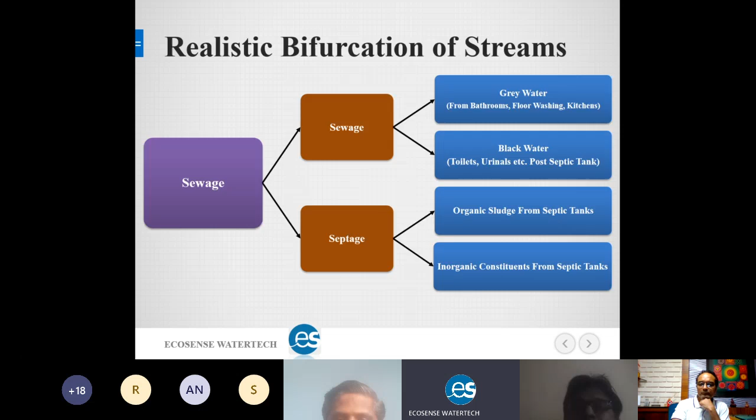Now, when we look at the constitution of sewage, we are looking at sewage generation in the following context.

Practically, when we talk about the entire sewage section, we are talking about approximately 98% to 99% of the content in the form of water, and hardly 1 to 2% of that entire quantum comes in as solids.

When we talk about the sewage water contents, the secondary demarcation is in the form of grey water and black water, which I had discussed earlier.

The third context of distinguishing the entire thing in a common manner is that when we talk about the sewage as a whole, grey water forms a majority portion of the volume, black water comes in next.

And hardly any amount comes in as septage. But as we know, septage is always the most problematic sector, which is still being studied or still being in the form of an understanding, wherein septage management comes in as a question.

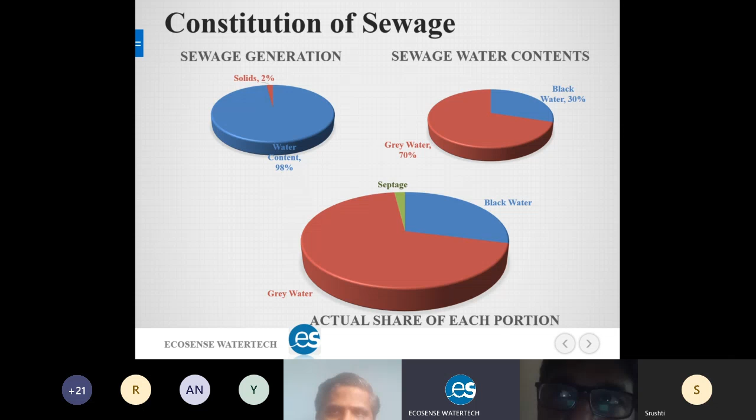When we are designing a treatment for sewage, the sewage treatment on the line similar to the bifurcation of the sewage treatment sector, this has to be again considered when you are designing a sewage treatment plant.

The sewage treatment is already bifurcated into urban community level STPs, rural STPs, and so on. But again, on the same lines, the parameters which are provided by each of these segments are significantly variable from one another.

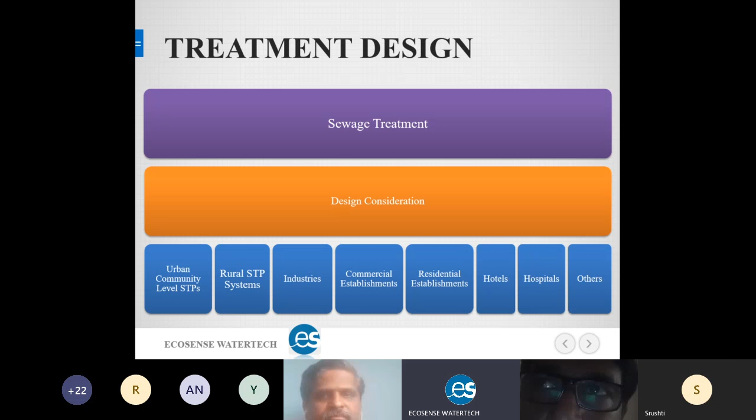Because of which each of these sewage treatment plants need to be designed as a single system. A common thumb rule cannot be applied to any of these scenarios.

Now, if we go by the baseline parameters, these can be obtained by studying any of the websites and any of the books that we have.

Normally, when we talk about that, we are talking about the BOD. Now, BOD stands for biological oxygen demand. There is a confusion in this segment, wherein many times it is called as biochemical oxygen demand, many times it is called as biological oxygen demand.

The main aim of assessing this parameter is to analyze the amount of oxygen which is required by the microorganisms in order to degrade the matter in a biological manner. That's a simple case scenario.

COD stands for chemical oxygen demand. So when we talk about black water, the black water comes in with a BOD of around 250 to 300, while the COD of the same black water comes in at 500 to 600.

Grey water has a pH which is on a bit alkaline side, obviously because of the higher amount of detergents and carbonates and bicarbonates.

The BOD of this system is very low. It is in the range of 80 to 100, and the COD is in the range of 150 to 200.

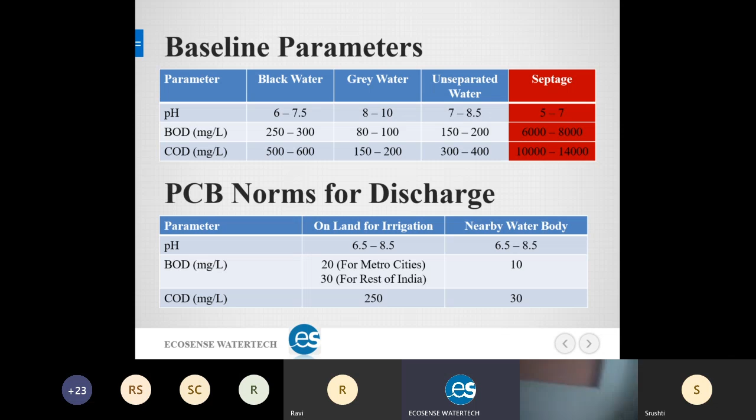Now this is for disposal on land for irrigation. When we are talking about disposal in a nearby water body, the parameters need to be much more stringent. Because of this, the PCB norms for discharge in water bodies specify BOD less than 10 and COD less than 30.

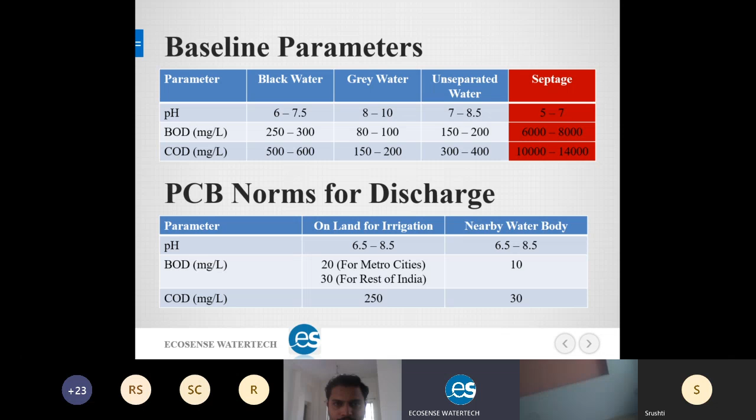Let me come back on this. When we talk about the treatment alternatives presently available for sewage, we have treatments like SBR, MBR, MBBR, AOP, ASP, and RO. I'll give the brief long form of each, but we'll discuss these in detail as we go ahead.

SBR stands for sequential batch reactor or sequencing batch reactor. MBR stands for membrane bioreactor. MBBR stands for moving bed bioreactor. AOP stands for advanced oxidation process. ASP stands for activated sludge process. RO stands for reverse osmosis.

When we talk about septage, the treatment systems available are solid thickening, drying, incineration, and digestion. There are a lot more, for which inputs may be welcome from your end as well.

Fundamentally, when we speak about septage management, we do not have an ideal, effective treatment for the same, and this is a very scary scenario. Yes, there are treatment systems being followed everywhere—some work very nicely, some have certain dangers coming in, but effectivity-wise, it's having a certain amount of issues.

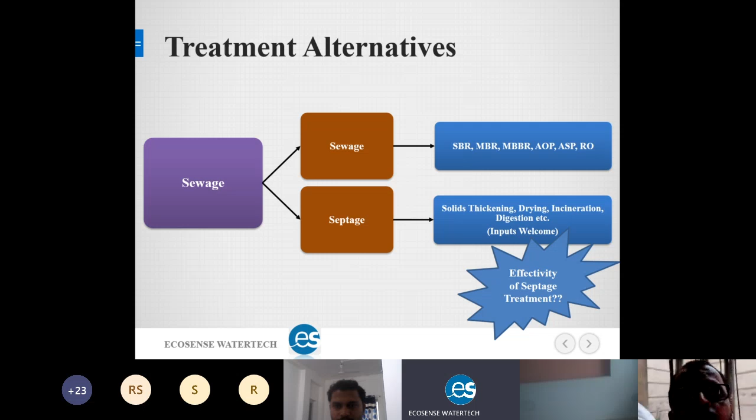Secondly, the number of users—how many people are going to be considered when we are utilizing this design for formulation of a final proposal or volume which is going to be treated by the sewage treatment plant. Third, what are the options available for disposal or reuse?

Though this is the third point, it is also very crucial, because depending on the option of disposal or reuse, the entire treatment system can be designed in a proper manner, or the design may cause a havoc. If we have disposal for gardening, that's fair enough.

But many times, which I have come across during my designing experience, there are a lot of people who require a treatment system to be installed in their basement, but they do not have even a single square meter of area for gardening. In such scenarios, it is extremely difficult to design the system.

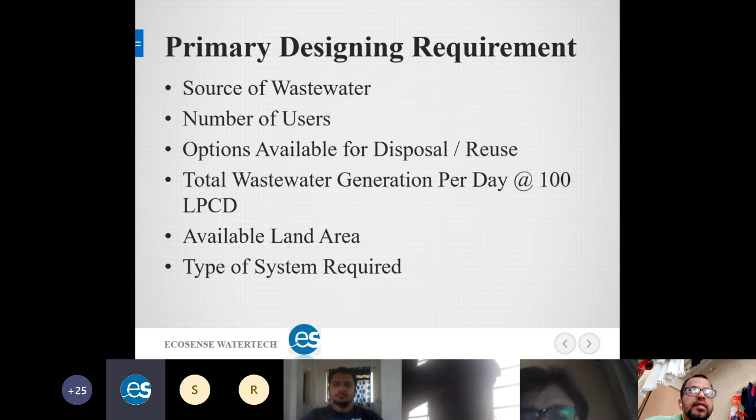Mr. Anant Kodwasal, who is a very reputed person in the sewage treatment and wastewater treatment sector, gave a seminar two days back wherein he noted that Bangalore was more inclined towards SBR, that is sequencing batch reactor, and Pune and its periphery were more inclined towards MBBR. That was the notion that he had put forward.

Before going ahead, I have prepared an example of the design for a proper system. In this scenario, let's take the example of an apartment complex with 50 flats, each flat having 5 residents. So we have 250 residents to be considered when designing.

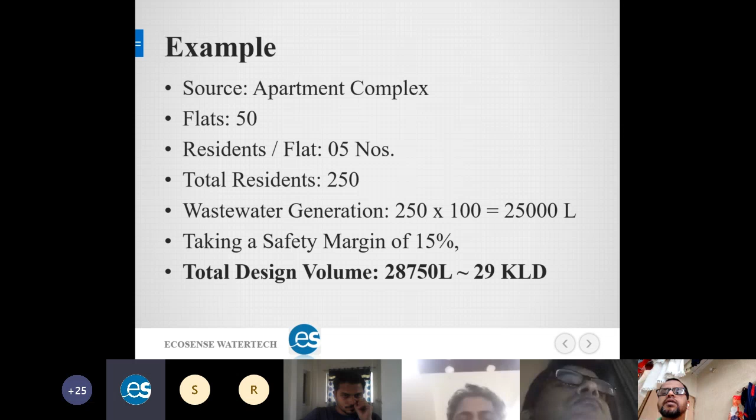Taking 100 liters per capita per day as the wastewater generation, the total amount of wastewater coming into the plant is going to be 25,000 liters. But we need to have a certain safety margin, so the total design volume at the rate of 15% safety margin comes to around 29 KLD.

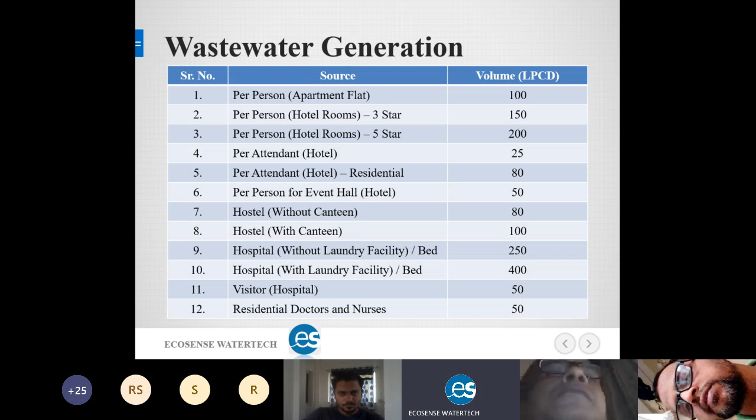This is the wastewater generation which we normally prefer for designing. Obviously, these values may differ from standard values or values given by separate organizations. But at the end of the day, keeping our experience in mind, we have tried to summarize the different types of volumes obtained from different types of sources.

For example, when we talk about a 3-star hotel, 150 liters per capita per day is the wastewater volume generated. Normally, the wastewater volume is 100 LPCD. But when we go to a 5-star hotel, we have to consider a wastewater generation volume of around 200 LPCD. Now, in any hotel, when considering a room, we have to take 2 residents as the maximum.

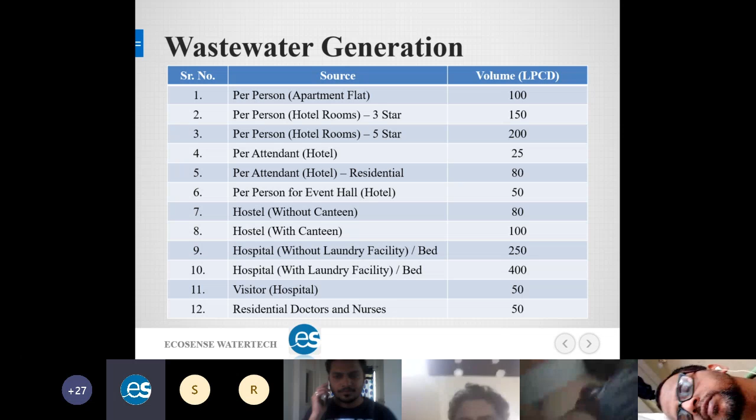This type of design may be called a conservative design, but at the end of the day, when we consider the maximum amount of flow which the sewage treatment plant is going to receive, this volume has to be considered. When we talk about installation of a sewage treatment plant for a hostel, the amount of wastewater generated for a hostel with a canteen is different than for a hostel without a canteen.

Similarly, for a hospital design, without laundry facility the amount of wastewater generated is 250 LPCD. A hospital with laundry facilities will have a volume generation of 400 LPCD.

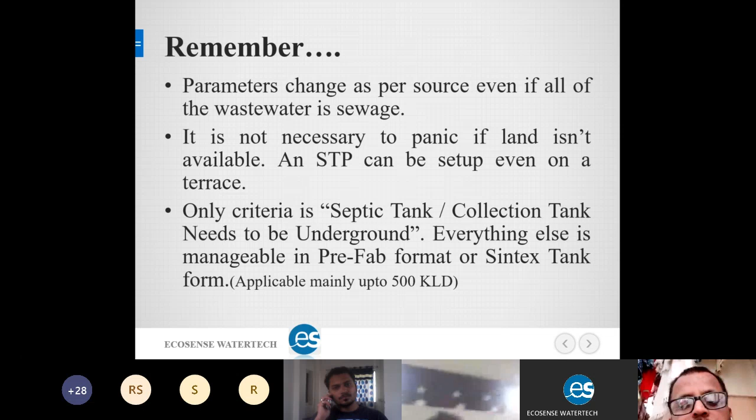End use is absolutely vital. This is to be understood very, very clearly. I have been talking about this from the start. Not deciding the end use before designing a system is very wrong, because end use itself defines the intricacy or complexity of a system.

Sewage water can definitely be treated up to drinking water quality standards. Obviously, this is a very possible scenario. Right now, the options available for treated wastewater disposal come in the form of sewer disposal, gardening, flushing, floor washing, car washing, and bathing.

In India, at the least, we are yet to come to a point where we can use that water for drinking purpose. Though it can be treated to drinking water quality, it's very difficult to find that mindset in India, where people as a whole, not just a specific community like engineers, can accept it as water suitable for drinking. As a community, it becomes difficult to visualize and make people understand that this water is good for drinking.

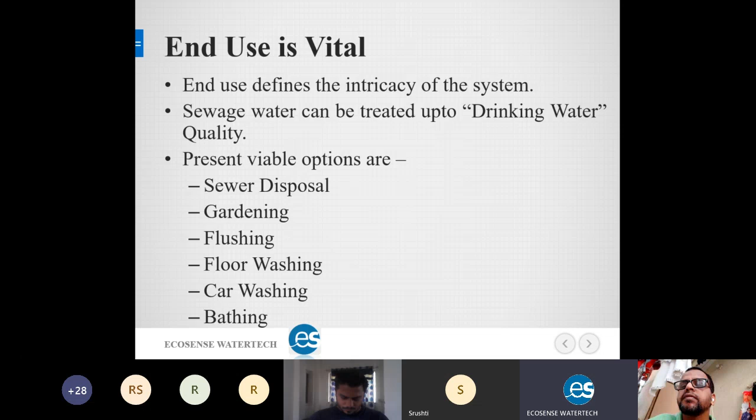This is the standard treatment flow, which applies when we are talking about sewage treatment. The primary treatment of any type of sewage comes in screening, oil and grease trap, and neutralization.

When we go into the secondary treatment systems, we are talking about anoxic or anaerobic treatment, aeration systems, SBR, MBR, MBBR, and rotating biological contactors, which is a more conventional method. It's still being used, but its use has reduced. And AOP, advanced oxidation process, is one of the newer systems which I'll discuss later.

When we are talking about disinfection, ozonation and chlorination are the mainly utilized disinfection measures right now. Tertiary filtration comes in the form of sand filters, the latest being glass filters, activated carbon filters, and advanced tertiary treatment in the form of ultrafiltration and reverse osmosis.

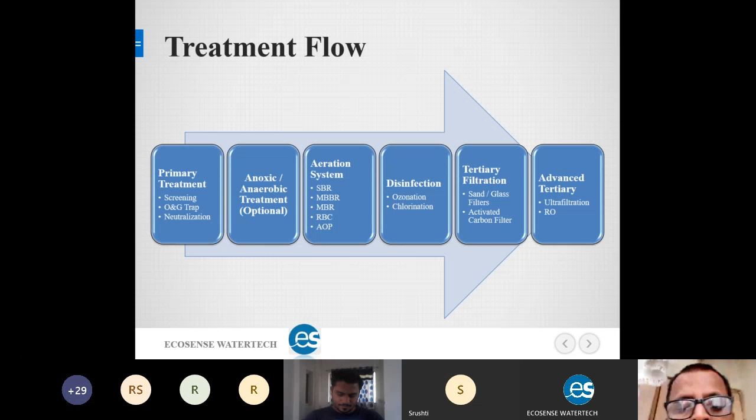Now let's take a step-by-step look. I'm taking a bit of time on these presentation slides because we need to understand exactly what the treatments are, since unless you understand those, the application of these treatments doesn't make sense.

So when we are talking about primary treatment, any and every apartment complex has its own septic tank. This is a given. Since we are coming from IPA as well as outside IPA, we as engineers and technocrats already know that a septic tank is always present for apartment complexes. Rather, for hotels and hospitals too, septic tanks are more or less always present.

Now, since we are talking about micro and mini level STPs—micro being STPs in the range of 5 KLD to around 250-300 KLD, and mini STPs in the range of 300 KLD to around 1 MLD—up to 500 KLD, if the septic tank is properly technically designed, primary treatment can be completely eliminated. There is no need for primary treatment if a properly designed septic tank is present.

But for larger plants, screening and oil and grease removal should be present. Now there is a newer mechanism wherein mechanized screening systems are available for oil and grease and suspended solids removal—I'm talking about the larger suspended solids.

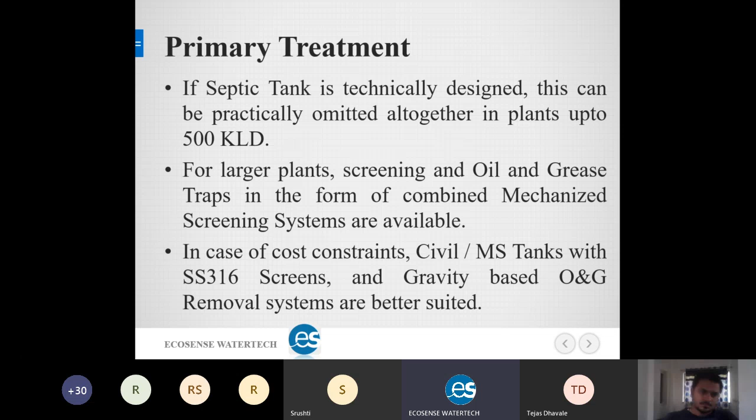That is not an issue when cost constraints don't permit you to go for a higher end treatment. The secondary treatment which we come to in STP design involves anoxic treatment systems or anaerobic treatment systems.

These treatments are actually very difficult to handle, and because of that, many anaerobic treatment system options are completely eliminated from sewage treatment plant designs.

But in many scenarios, it is crucial to understand that anaerobic treatment systems are a very robust type of system which can handle shock loads extremely efficiently. Having the anaerobic treatment system as an alternative becomes a more ideal solution for ensuring the treatment system continues without any hitch for a long period of time.

When we talk about nitrification-denitrification cycles, anaerobic treatment systems always play a very important role. Denitrification normally occurs in the anaerobic or anoxic zone of a system. In a sewage treatment plant, the septic tank itself is a very basic type of treatment system. But to achieve proper denitrification, we require an additional anaerobic treatment system to ensure that the total nitrification and denitrification cycle is completed, especially for removal of ammoniacal nitrogen.

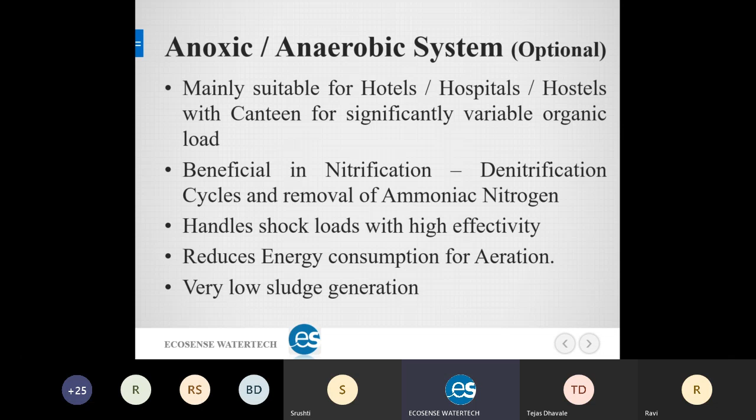When we talk about the anaerobic system, we are talking about reduction in area as well as energy perspective. The types of anaerobic systems utilized in this type of system are anaerobic filter, DEWATS, baffled anaerobic reactor, and CSTR, which stands for completely stirred tank reactor.

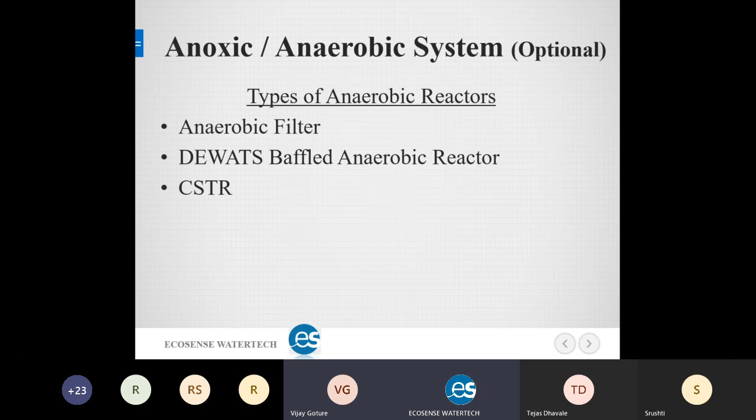These are the aeration systems we are talking about. Now, when we talk about aeration systems, we have a lot of... just a second, somebody is not muted.

Sorry. When we talk about aeration systems, let's talk about SBR, the sequencing batch reactor, which stands for batch-based treatment of the system. Before we go ahead, I have to clarify that many treatment seminars I have attended provide a general amount of information about what exactly an SBR, MBR, or MBBR is, but nobody gives a proper idea about whether the SBR is installed after fecal separation or before fecal separation.

This causes a lot of confusion. So in my design, I'll be very clear that when we are talking about an SBR system, we are talking about a system which does not require fecal sludge separation.

SBR normally has a certain set of processes, wherein in a single tank we have a fill cycle, a react cycle wherein aeration is done, a settle cycle wherein aeration is stopped and solids are allowed to settle, a decant cycle wherein a portion of the settled solids is removed and the total supernatant is removed from the system, and an idle phase wherein the remaining sludge is activated and also wasted.

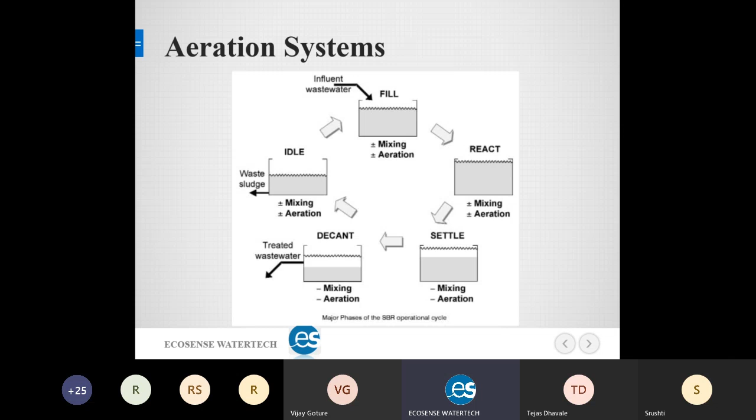When we talk about an SBR, the sequential batch reactor has certain advantages and disadvantages. This is the same analysis done for all the systems, so you can easily follow along. When we talk about the advantages of a sequential batch reactor, it is a single tank system with optimized energy consumption.

I say optimized energy consumption because aeration is done for a specific amount of time only. Since this is a batch-based process, aeration is required only for a certain amount of time within the batch. For other portions, aeration is completely stopped, so the energy required in comparison to a conventional treatment plant is very competitive. The efficiency of treatment is very good and the end parameters are achieved.

Yes, the sequential batch reactor does that. The disadvantage of the system is that it is quite complicated, and when we try to maintain it in a semi-auto or manual mode, it causes a lot of disruptions, which we have actually observed at one of our clients. We are already in the process of changing that system from an SBR system to a completely new type of system, in the form of an aerobic extended aeration process.

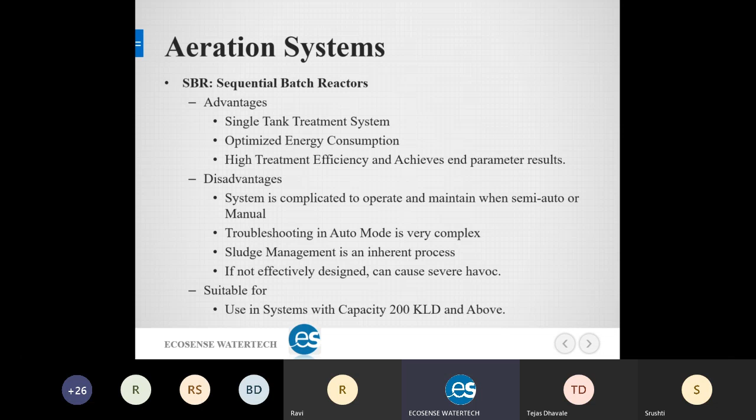Moving to the next one: Moving Bed Bioreactor, MBBR. This is a very common and popular option in Indian Railways as well as in many systems designed in and around Maharashtra. MBBR is based on a treatment system design wherein an aeration tank is converted into a floating film media based system. These are the media blocks used, different types of media blocks, all based on surface area calculations.

MBBR systems always rely on surface area calculations, and because of that, the designing of this type of system is very crucial. I'll give you some simple points to understand the MBBR system. As you can see, the aeration tank here...

Hello. Hello. Hello. Yes, who is there? Sagar sir? The audio is not coming through for Sagar sir. Who is this? This is Madan speaking. Okay, let me check. Can you please unmute your mic? Hello. Tejas, am I audible? Yeah, now sir. Sorry, there was... due to the weather conditions, many people are not able to connect to this video. No issue, Madan sir. Can you hear Sagar sir? Madan sir? Yes, I can hear. All right, go for it sir.

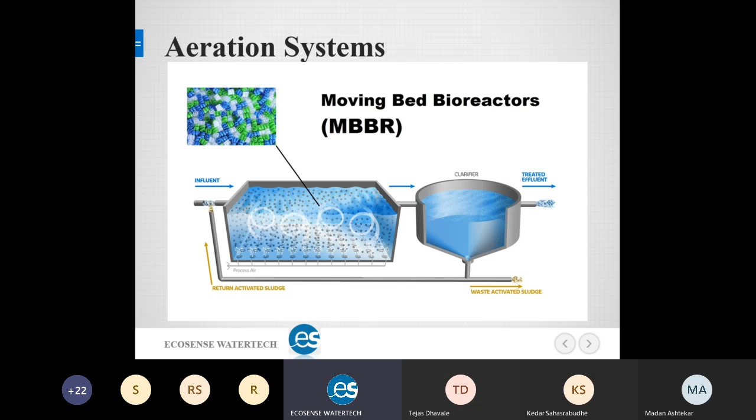When we talk about the surface area of this kind of system, we have media which is made from PE, that is polyethylene. Sometimes the media is also made from PP. Sometimes the media is also made from PVC, sorry. And there is a separate range itself wherein the media is manufactured from recycled material.

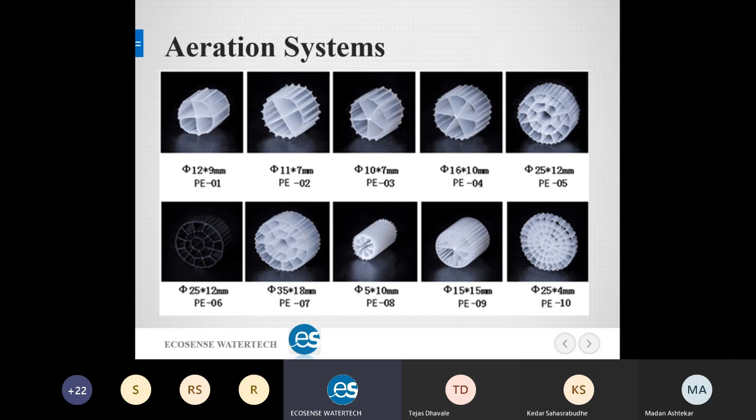As a designer, I normally prefer recycled PP as the material because it is much cheaper and it is much easier for me to give a properly designed and cost economic system to my client.

When we talk about the MBBR system and its advantages and disadvantages, we are talking about reduced aeration tank footprint. This is very crucial. When we talk about conventional aeration tanks, the amount of area required is very high. By utilizing MBBR media, this footprint can be reduced by at least 30%.

When we talk about an aeration tank, as a standard, we have an aeration basin and a collection or settling basin. The activated sludge from the settling basin is recycled back to the aeration tank, due to the carryover of biomass from the aeration tank. When we have MBBR or moving bed bioreactor media, this carryover related issue is reduced significantly.

Yes, there is a requirement of a settling tank in any case, but at the end of the day, the amount of sludge replenishment done in a conventional treatment does not make sense to be done in the MBBR as well.

When we are talking about an MBBR with the increased surface area available for the bacteria to grow on, we are talking about an increase in efficiency as well. So, the efficiency given by the MBBR reactor is quite higher as compared to the conventional aeration tank.

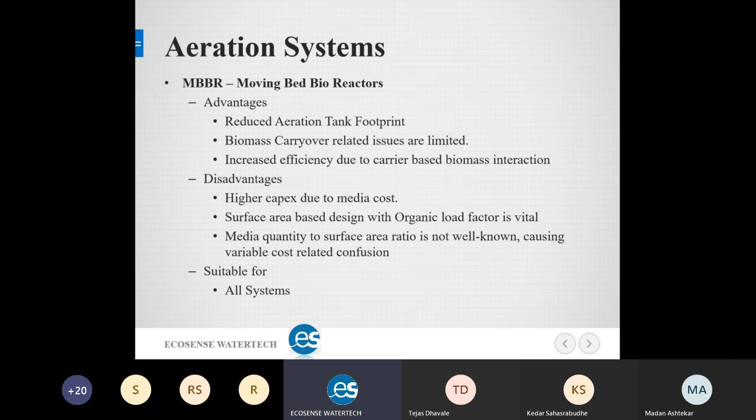This type of MBBR system is normally suitable for all types of STPs, from micro to large scale plants. So I'll not be going into further details of it.

When we talk about aeration systems called MBR, that is membrane bioreactors, we are talking about the utilization of simple ultrafiltration systems, submerged ultrafiltration systems for separation of solids and liquids. Now, there is confusion among many designers regarding MBR. MBR is not an aeration system. It is just a solid-liquid separation unit given in addition to the aeration tank in order to replace the collection tank, settling tank, tube settler, or similar mechanisms.

So when you are designing a system, let's say you have designed a system for an extended aeration process or an activated sludge process or an MBBR for that matter, the amount of volume required for an MBBR reactor will remain the same, but the MBR system will require an additional volume for installation.

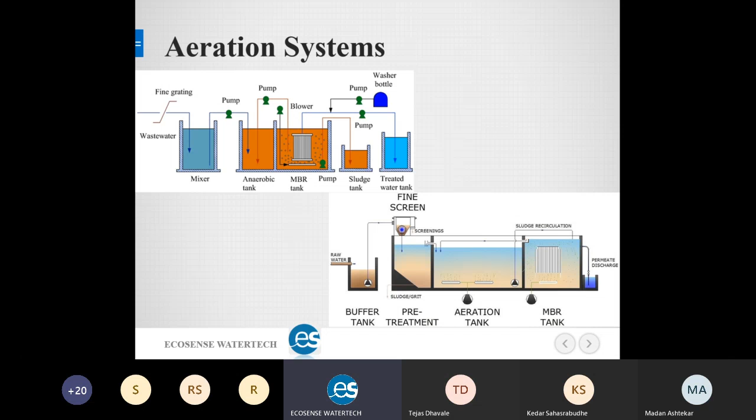In the aeration zone, the aeration is required for increasing the dissolved oxygen content of the water, while in the MBR zone, the air is required for scouring. In short, we want to have the friction of different MBR strands on one another in order to separate the sticky solids from the MBR surface, because if that remains stuck on the MBR modules, the cleaning frequency increases.

When we talk about MBR systems, one advantage is reduced system footprint, which is extremely advantageous for areas with very low available area. An MBR system for a 50 KLD tank may require a surface footprint of around 8 to 10 meters square. But the settling tank and final treated water tank are underground, in the client's scope.

So footprint is reduced, but the amount of civil construction is increased. The water quality provided by the MBR system is consistent because of the complete removal of suspended solids in a single stretch. But the disadvantage of an MBR system is that it has significantly higher capex compared to conventional systems like MBBR and SBR.

It should be understood that MBR modules do not have an impact on the BOD of the wastewater. Many times you get a photograph of beautifully crystal clear water, but the BOD of that water is very high. This happens because aeration is not designed properly. Even though MBR is installed and the water is clear, the designed reduction efficiency is not achieved.

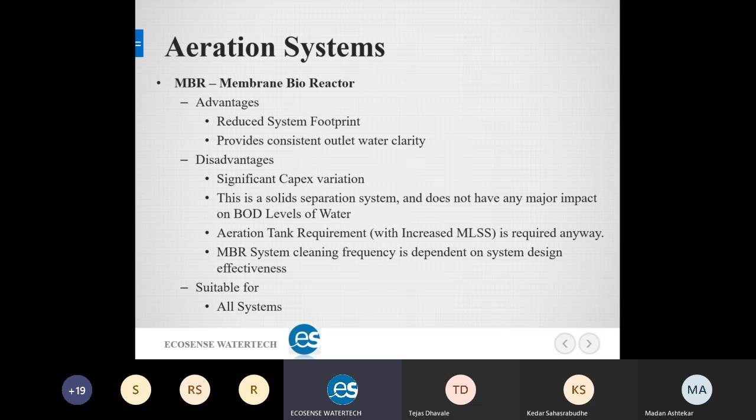Coming to the advanced oxidation process. Advanced oxidation process is a lesser known technology in sewage treatment, because although a large number of people have studied and researched this technology, its application in sewage treatment is still in its fetal stage.

Advanced oxidation process utilizes the application of ozonation and ultraviolet system in a single go, wherein there is no biomass development.

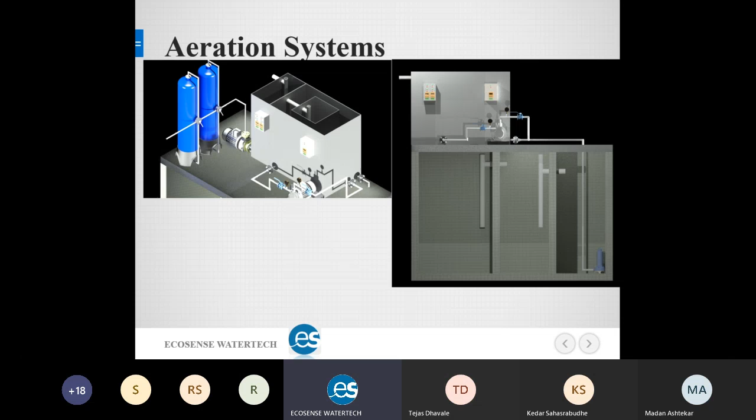This is the standard process flow diagram of an advanced oxidation process.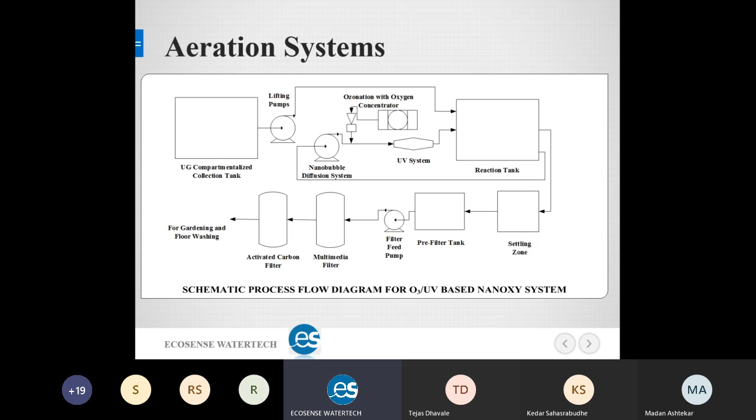इसी ट्रीटमेंट सिस्टम का एक और कॉम्बिनेशन आता है जहां पे ये मल्टीमीडिया फिल्टर और एक्टिवेटेड कार्बन फिल्टर रिप्लेस हो जाता है विथ PVDF MBR मेम्ब्रेन बायोरिएक्टर, जिसके कारण कॉस्ट थोड़ा बहुत बढ़ जाता है लेकिन प्लांट की एफिशिएंसी भी उतनी ही रहती है।

जब हम एडवांस ऑक्सीडेशन प्रोसेस के एडवांटेजेस देखते हैं तो इसकी फुटप्रिंट भी बहुत कम होती है। देयर इज नो रिक्वायरमेंट ऑफ बायोमास मेंटेनेंस, नो रिक्वायरमेंट ऑफ ब्लोअर्स, नो रिक्वायरमेंट ऑफ मीडिया। The footprint of this plant for a 50 KLD process is hardly 12 meter square, यानी कि 3 मीटर बाय 4 मीटर के एरिया में आपका ये पूरा का पूरा प्लांट बैठ सकता है।

The parameters which are achieved are consistent। Since we are talking about mineralization of organic matter, sludge is very very low, and after dewatering it can also be given to gardening। तो हमें ऐसा नहीं है कि वो जो ऑर्गेनिक इनऑर्गेनिक स्लज डेवलप होता है उसको डायरेक्टली अपने को सेप्टिक टैंक में ही देना है। वी कैन डायरेक्टली डिस्पोज इट टू द गार्डनिंग फैसिलिटी एज वेल।

द डिसएडवांटेजेस आर दैट अगर हम इसमें MBR सिस्टम डालते हैं तो कैपेक्स इंक्रीज हो सकता है, और इसमें मैकेनिकल इक्विपमेंट ज्यादा होने की वजह से इट मे रिक्वायर मैकेनिकल मेंटेनेंस ऑन बायएनुअल बेसिस, यानी कि साल में एक बार या 2 बार इसका मेंटेनेंस करने की जरूरत पड़ सकती है। So when we are talking about the applicability, this system can be applied right from the micro scale to the large scale।

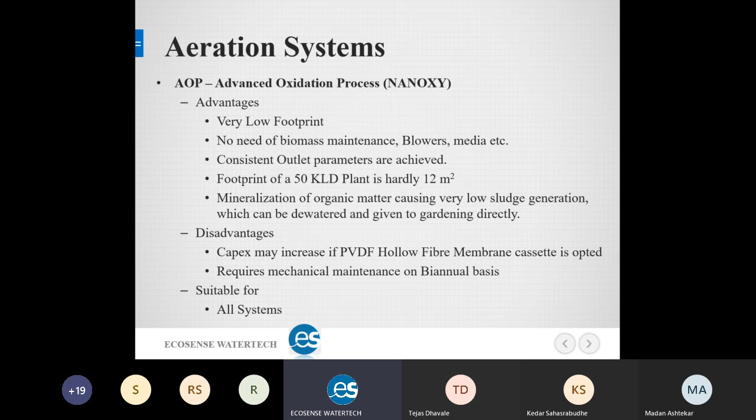Disinfection, there are a lot of options which are available, but ozonation as a standalone, ozonation with oxygen concentrator, chlorination system in the form of liquid dosing, and chlorine generator systems, which are normally used for large scale applications — these are the available disinfection options.

अब आपको ये समझना है कि it is to be understood, please, if anybody tries to provide an ultraviolet system as a disinfection unit for your sewage treatment scheme, please say no to it. Do not say yes to a UV system standalone for disinfection in sewage treatment. It does not have the proper effect. UV system is always suggestible for disinfection of water treatment plants, or water treated by water treatment plants. In sewage treatment, the amount of pathogens present in the wastewater even after treatment is quite high. So please do not say yes to an ultraviolet system application in a sewage treatment plant as a disinfection system.

AOP में आपको एडिशनली डिसइंफेक्शन सिस्टम की जरूरत नहीं पड़ती, क्योंकि यहाँ पे हमने ओजोनेशन भी दिया हुआ है, एंड एन एडिशनल सेफ्टी मार्जिन के तौर पर हमने UV भी दिया है।

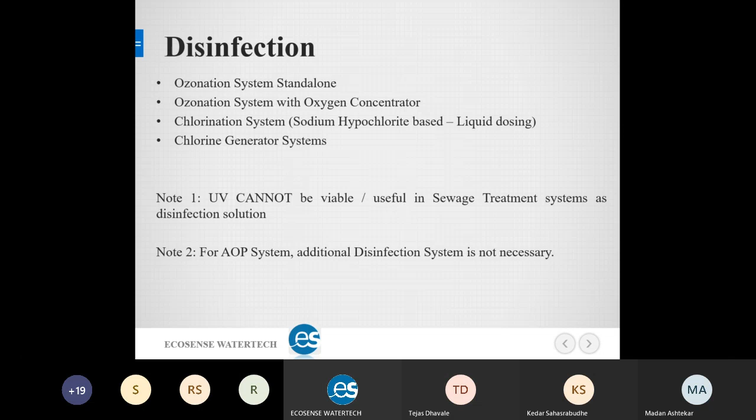The tertiary treatment, as I had suggested earlier, multimedia filter — इसमें अवेलेबल मीडिया जो होता है वो क्वार्ट्ज सैंड होता है, अल्ट्राफाइन जियोसॉर्ब, this is a German media which we normally use। This gives you a treatment efficiency of removal of solids less than 20 micron। So it's a very good addition to your multimedia filter। Recently, there is also a new media which is in the market in the form of a glass media। The application of this multimedia filter is normally for trace suspended matter।

इसके लिए जो vessels use किए जाते हैं उनके material of construction (MOC) होते हैं: fiber reinforced plastic (FRP), MSEP जो mild steel with epoxy coating है, MSFRP जो mild steel with fiber reinforced plastic coating है, और MSRL जो mild steel with rubber lining है। When we talk about carbon filter, the media which is utilized in this is activated carbon which has a higher iodine value of 600, 900 or 1000।

There are many suppliers who give you an iodine number of around 1100 to 1200, but I am not exactly sure about the authenticity of that number, because normally the standard maximum iodine number is around 900. 1000 may be probable, but 1100 is to be questioned.

The application of a carbon filter is normally for the removal of suspended color and odor, as I told earlier.

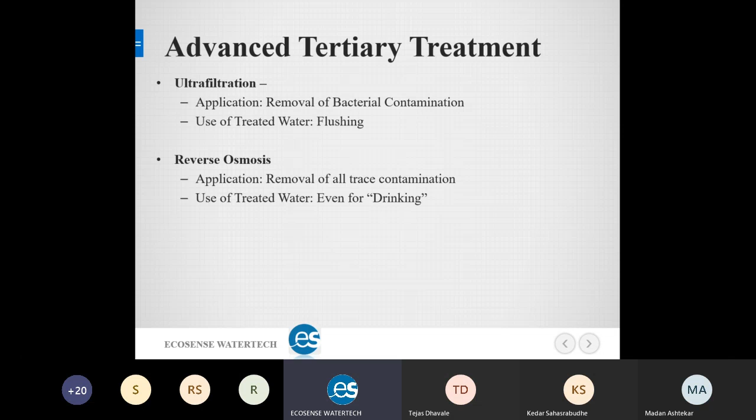I have told you all this, but there is a major question which is yet to be answered, which I have not done up till now.

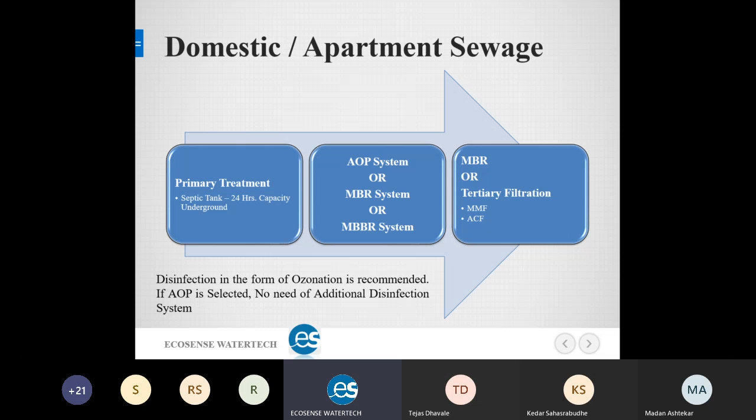जब आप डिजाइन कर रहे हैं होटल या हॉस्टल के लिए विथ कैंटीन, प्राइमरी ट्रीटमेंट में स्क्रीनिंग शामिल होनी चाहिए, जिसमें आप बार स्क्रीन या मैकेनाइज स्क्रीन लगा सकते हैं। ऑयल सेपरेशन सिस्टम भी आवश्यक है, क्योंकि जब हम होटल या कैंटीन वाले हॉस्टल के वेस्ट वाटर की बात कर रहे हैं, तो ऑयल कंटेंट काफी ज्यादा हो सकता है।

After both of these systems, you need to have a septic tank of 24 hours capacity. In the second level, you have to have an anaerobic filter, which is optional. It is recommended if the flow is above 200 KLD.

अगर 200 KLD से ज्यादा फ्लो है तो anaerobic filter always recommend किया जाता है, क्योंकि यहाँ पे फ्लो में भी वेरिएशंस बहुत सारे हो सकते हैं और कैरेक्टरिस्टिक्स में भी वेरिएशंस बहुत सारे हो सकते हैं। तो इस मामले में अगर हम एओपी यानी एडवांस ऑक्सीडेशन प्रोसेस के लिए नहीं जा रहे, तो एनारोबिक फिल्टर एक रिकमेंडेड यूनिट रहेगा, क्योंकि ऐसे सिचुएशंस में शॉक लोडिंग कैपेसिटी होना बेहद जरूरी होता है।

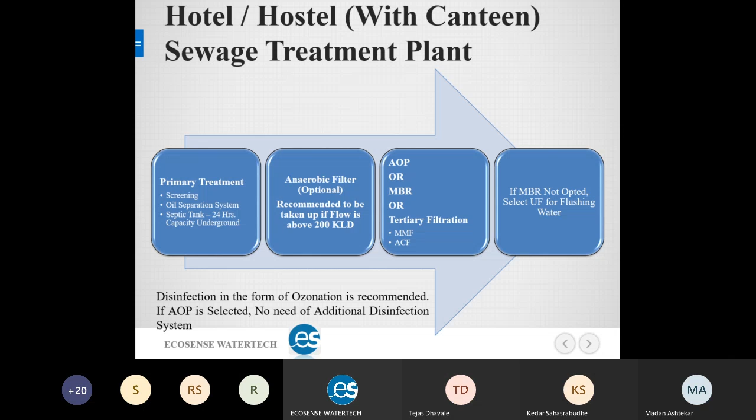या व्हेन वी गो फॉर अ हॉस्पिटल ट्रीटमेंट प्लांट, हॉस्पिटल ट्रीटमेंट में सबसे ज्यादा जरूरी है कि हमारे पानी में जो कंटेंट होती है वो ठीक तरह से समझी जाए। हॉस्पिटल में सबसे ज्यादा वेस्ट वाटर में आने की संभावना पैथोजेनिक कंपोनेंट्स की भी होती है।

हॉस्पिटल्स में जो पेशेंट्स होते हैं, जब वे टॉयलेट और बेसिन का इस्तेमाल करते हैं, it is always a probability that certain amount of pus, blood or any other antibiotic which is being disposed of may be accidentally or deliberately disposed of in the sewage line. So in this kind of a scenario, having a properly designed septic tank of 24 hours capacity is always crucial.

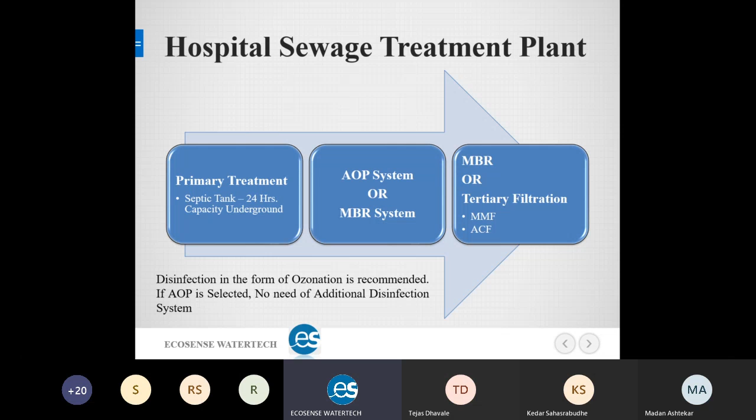In the second phase, you can go for an AOP system or an MBR system. In the third phase, we can go for an MBR system or tertiary filtration. MBR यहाँ पे दो जगह आ रहा है, क्योंकि अगर आप AOP सिस्टम लेते हैं तो थर्ड फेज में आप MBR सॉलिड लिक्विड सेपरेशन के लिए ले सकते हैं, लेकिन अगर कॉस्ट इकोनॉमिक्स परमिट नहीं करता है तो आप टर्शियरी फिल्ट्रेशन इन द फॉर्म ऑफ मल्टीमीडिया फिल्टर एंड एक्टिवेटेड कार्बन फिल्टर सिलेक्ट कर सकते हैं।

उसकी वॉल्यूम को कम किया जाता है, स्लज की वॉल्यूम को कम किया जाता है, सॉलिड्स की कंटेंट को बढ़ाया जाता है, स्लज का डाइजेशन किया जाता है जिसमें से गैस को रीयूटिलाइज्ड किया जाता है। स्लज डीवाटरिंग में स्लज में से जो भी मॉइस्चर कंटेंट है वो निकाल के अप्रोक्सीमेटली 15 to 20% तक लाया जाता है। उसके बाद उसको ड्राई किया जाता है या फिर उसको जलाया जाता है, and it may also be applied in compost.

So if we are planning to install a system on the terrace, the only thing which is required from the client is an underground collection tank at the bottom of the apartment or in the basement, wherein the sewage water is collected. From there, it is lifted by using a level sensor based mechanism to the terrace, wherein it is treated, and the treated water is again diverted back to the gardening or sewer disposal application.

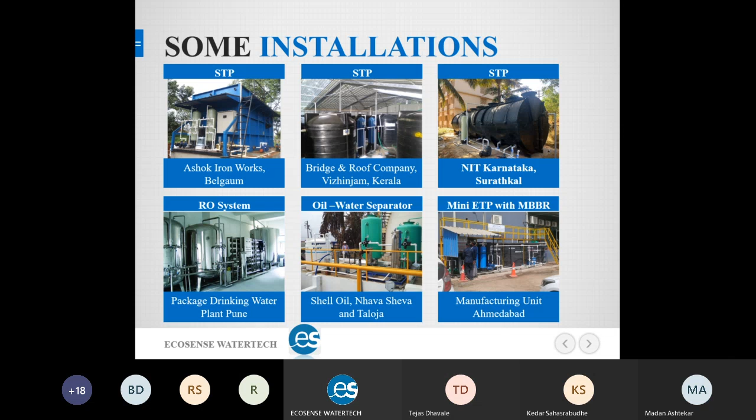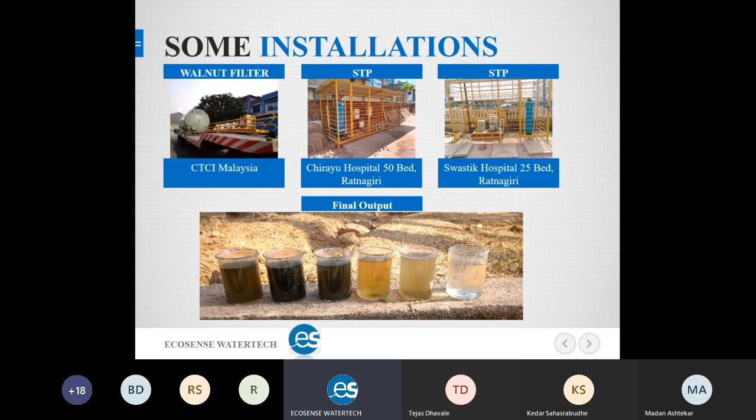As you can see, it is always essential that we have proper systems in place. And when we talk about designing, we can come to certain conclusions based on this type of info.

Before going to the conclusions, I can definitely say that when we are talking about designing of a system, what I have tried to present to you may seem like a very basic presentation, but when we design a system for small scale clients - from micro clients to small scale clients, I am talking about 5 KLD to 500 KLD - it is to be understood that these are the people who are in the most problem.

They don't get the right advisory, they don't get the right type of installation, they don't get to do the right type of operation. Because of this, many of the treatment systems designed and installed in this capacity range of 5 KLD to 500 KLD, many times, rather most of the times, fail not because of design issues, but because of issues right from inception to installation.

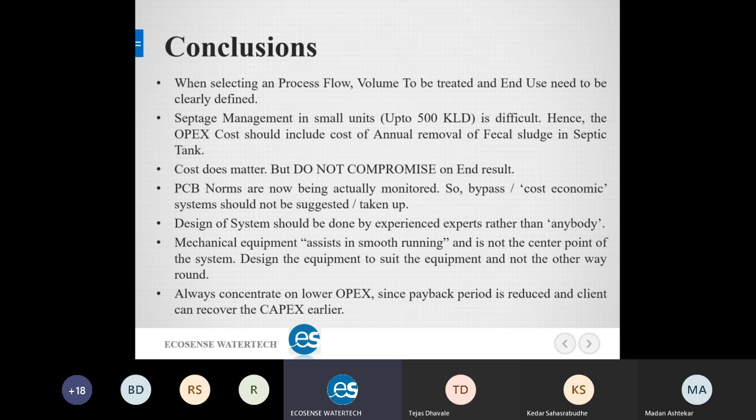Finally, when we talk about a project, always concentrate on lower OPEX, that is operational expenditure, rather than concentrating on CAPEX. Because CAPEX is a one-time expenditure, but the higher your OPEX is, the lower the client's willingness to run that plant will become. He will be reluctant to run the plant not because the plant is bad, but because the operating expenditure is very, very high. So that is something we have to take care of.